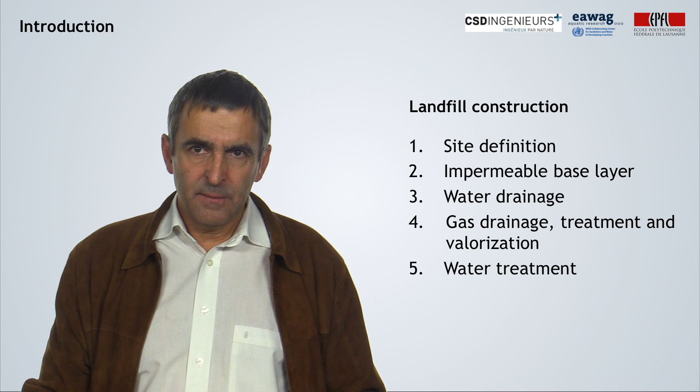Now let's speak about landfill construction. We will see some important elements to be considered for building a new landfill.

It is usually very difficult to find a new landfill site, especially near big cities, for different technical and political reasons. It is often impossible to find a site which meets all the environmental and economic criteria. For that reason, a lot of cities have progressively transformed their dump site into a controlled landfill. This is the case of Rio de Janeiro, but also of Geneva, for example.

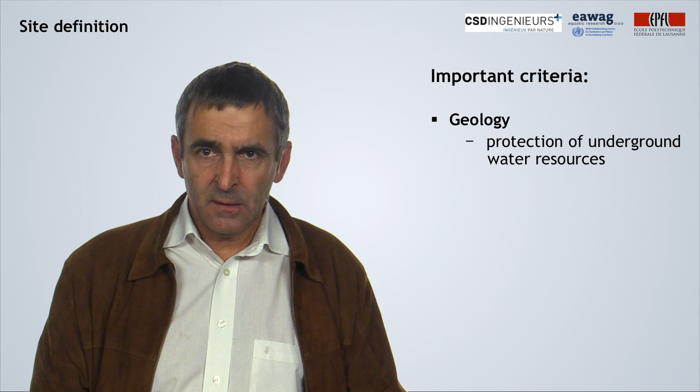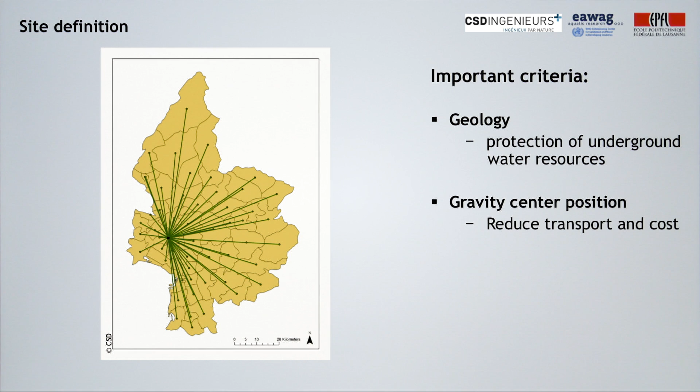Another criteria is the site position in the service region. In terms of traffic, as we mentioned before, the best place for a landfill is the center of gravity of the region. Each kilometer away from this center represents, on average, 2 more kilometers for each truck along the route. This has an impact on the environment and on the cost.

An important criteria is to have a big surface and a long-term available volume. It is important to build a landfill for 30 or 50 years. For that, it is necessary to build the first steps and have the possibility to create future cells for the next years.

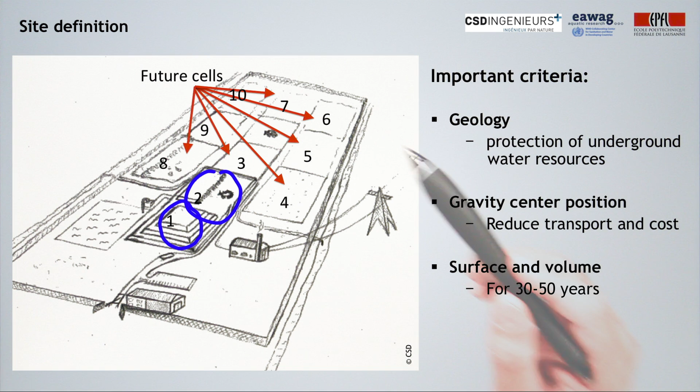Another point is to have a local availability of earthen material for the covering works, for covering the different steps of the landfill. A landfill needs a very big volume of such material to cover the waste.

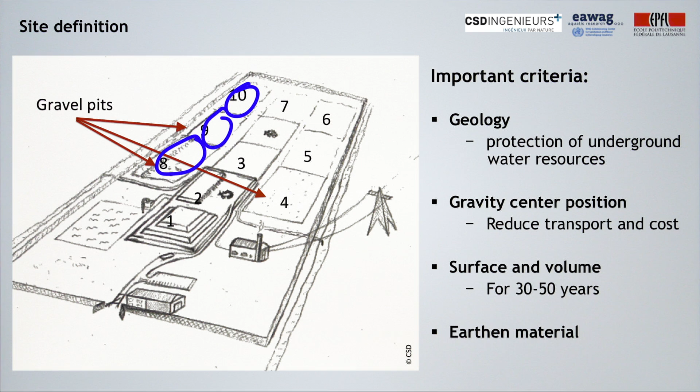For that, it is eventually partially possible to use inert construction material, but local quarries are also necessary to have the required materials. These local quarries can become the next cells of the landfill. Otherwise, the transport cost will be too high to make a good job.

An impermeable base layer is important to reduce the infiltration of wastewater into the ground. Many European norms propose plastic impermeable layers. These plastic solutions are expensive, and extremely fragile during the construction and operation phases.

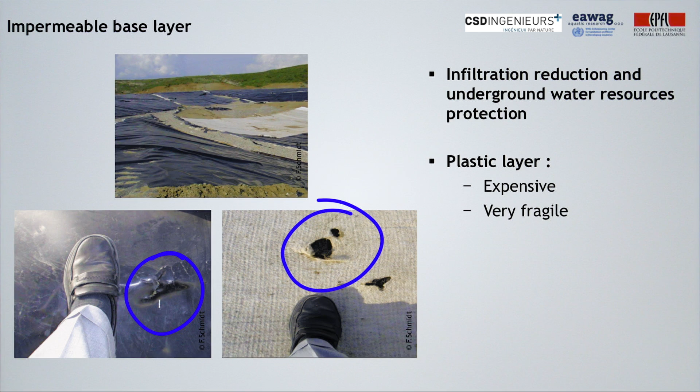I'm largely in favor of using mineral layers, using local material available in the area. This needs some geotechnical knowledge in order to find a good material in the region that can be compacted with high density and low permeability.

Normally, we need to mix different proportions of sandy material with clay and strongly compact it in 2 or 3 layers of 20 or 30 centimeters.

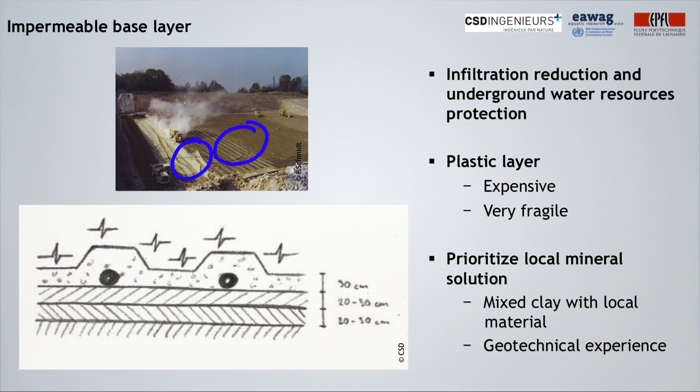The rainwater flowing through the waste becomes highly polluted. We call this substance leachate. It is very important to have a very good drainage system for this leachate at the bottom of the waste.

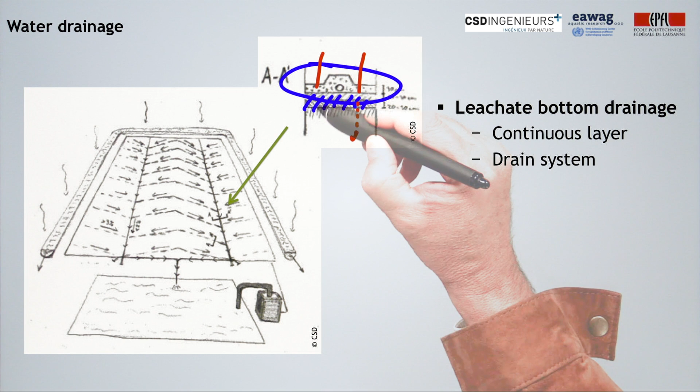Here we have the bottom of the waste with the impervious system, and here the drainage system. This drainage system is important for two reasons. First, the quantity of leachate that can flow into nature through the impervious layer is directly proportional to the height of the water on top of the bottom of the landfill.

If we have good drainage, we reduce this height to a very limited level, and then we reduce infiltration into nature.

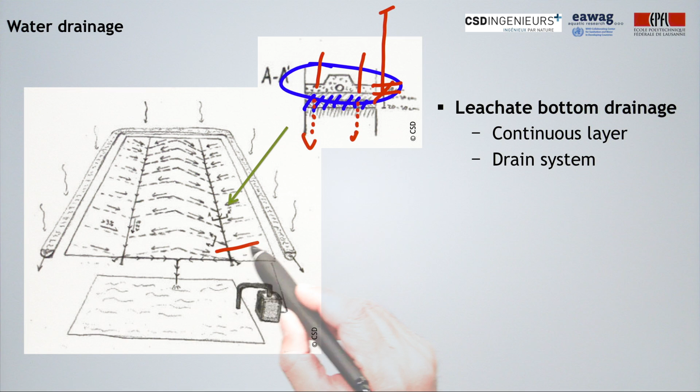The accumulation of water on the bottom of the landfill will increase the risk of instability, and for this reason it's very important to take this water out of the waste.

The leachate has generally a high potential of clogging the drainage. To avoid that, the leachate drainage is realized through a continuous drainage layer of 20 to 30 centimeters of pervious material. It is possible to use inert construction waste for that, like bricks or concrete waste. The best is to add drainage tubes with a design allowing future access from outside for possible control and cleaning of the main tubes.

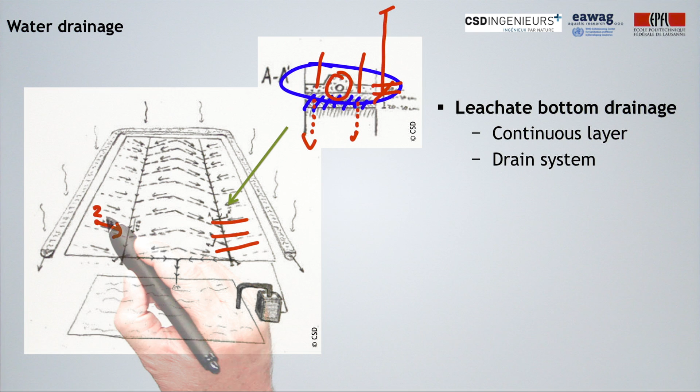A slope of a minimum 2% to 3% must be considered. All around the landfill, a big drainage system must be constructed in order to avoid that water enters the waste.

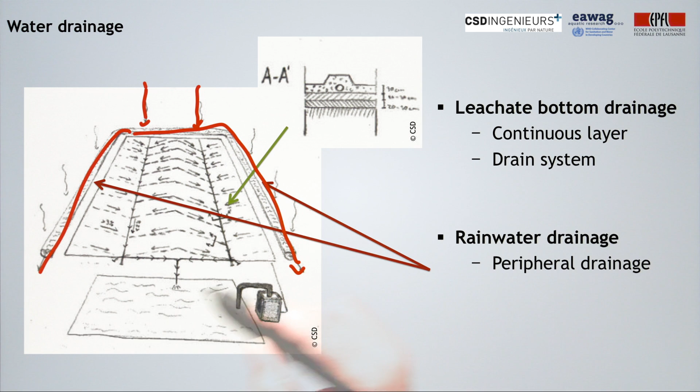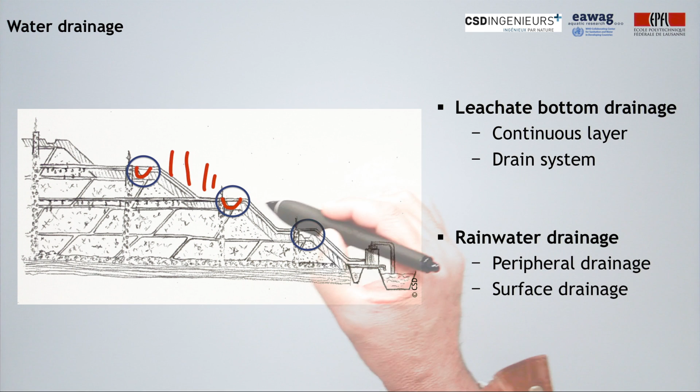Additionally, it is also important to capture and evacuate the rainwater coming on top of the landfill and to avoid a possible erosion effect of the cover top.

The degradation of the organic matter without oxygen produces methane, as well as a small proportion of other gases producing very bad odors for the human nose. Methane production also has a very high contribution to the greenhouse effect on climate.

The gas drainage and burning has two important functions: reduce the bad odors for the population, and reduce the greenhouse effects. There are different techniques for gas drainage.

The most common is to realize a stone stack during the development of the landfill. This can be done through a simple accumulation of stones or inert material around a metallic tube, which is elevated layer by layer. The accumulation of stones creates a continuous vertical drainage stack, and the metallic tubes can be used very easily to fire the gas coming from the waste.

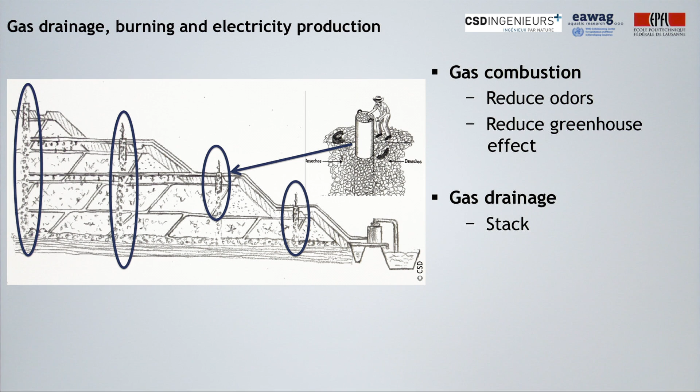These gases represent a huge energetic potential. In a second step, the gas can be collected through a pumping system to a motor generator that will produce a continuous production of electricity. These technologies exist and are very efficient.

The economic interest of this electricity production is strongly dependent on the price of electricity. But it's important to mention that such a system requires high technology, both for the gas drainage system and for the preventive maintenance of the motor.

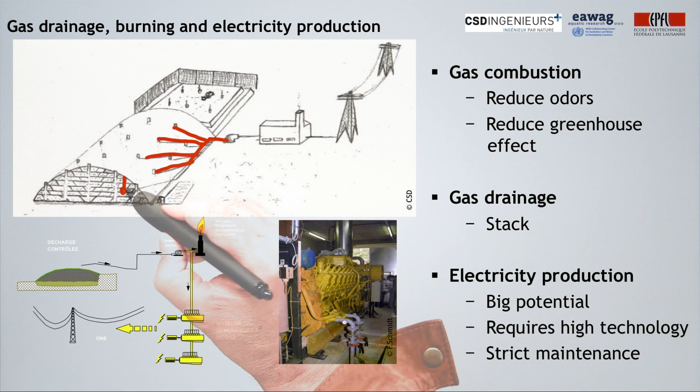The design of the tube collecting the gas to the pumping station should be done considering a high settlement of the waste during the life of the landfill. This will create some technical problems, but can be solved.

Honestly, landfill leachate is very difficult to treat. Usual biological processes for urban wastewater have very limited efficiency on that kind of water. On the other hand, it makes no sense to build and pay for an expensive impermeable layer in plastic or mineral at the base of the landfill if the leachate is just collected and then discharged into the environment downstream of the landfill without treatment.

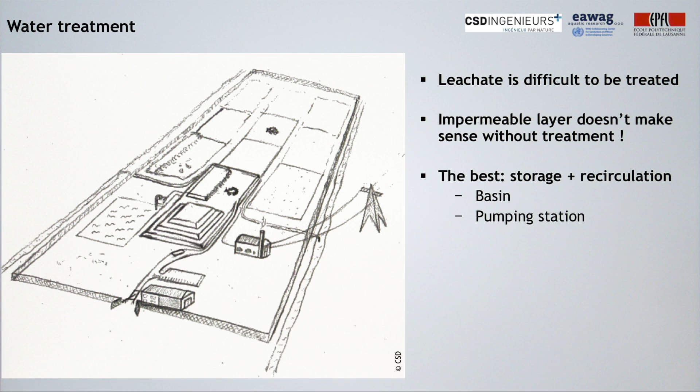Depending on the climate, the best solution is often to store the drained leachate in a big basin and then pump it and recycle it into the waste system. This needs a pumping system and an infiltration system with drains that allow the leachate to enter again into the waste.

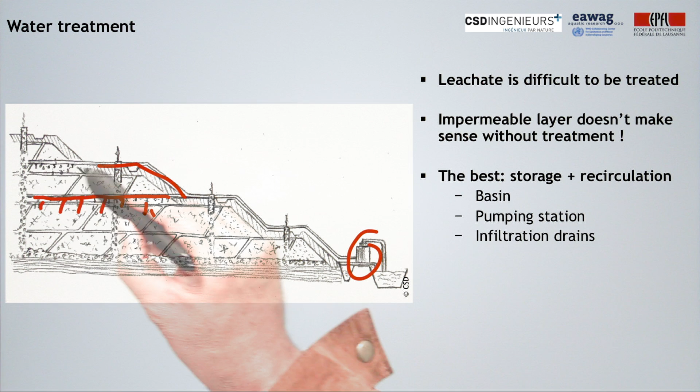This storage and recirculation have many beneficial effects. First, it will treat and partially evaporate the leachate water. Secondly, it will increase the gas production and then the electric production, in case a gas-to-energy system is in place.

It will generate an important volume reduction of the waste. The production of gas will reduce the organic composition of the waste, and this gain in volume will give an interesting economic value and increase the landfill life.

The volume of the leachate basin has to be defined according to local climate conditions along the year.

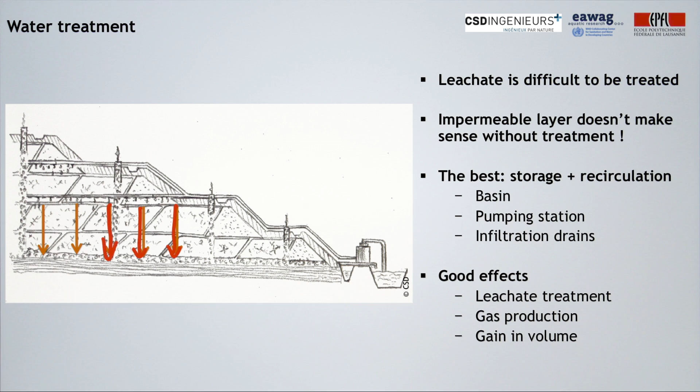Main points of landfill construction are to use local material, involve a geotechnical engineer, control the water, and capture and burn the gas.